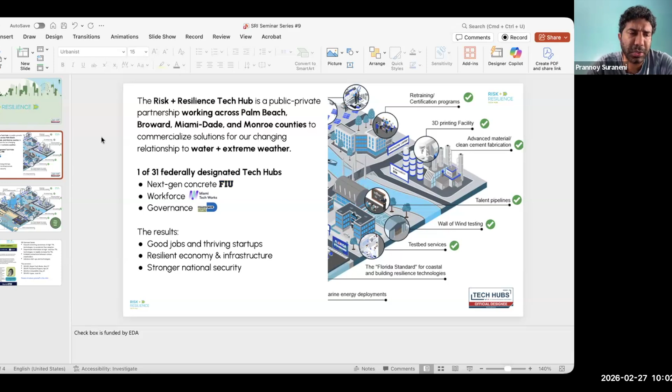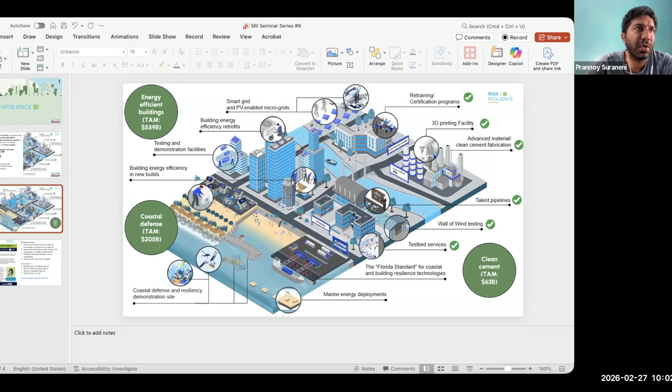national security. Broadly speaking, we are interested in an entire ecosystem. In the oceans, for example, coastal defense is critical. When we talk about buildings, energy efficient buildings are critical, clean cement for manufacturing purposes, and a number of other components that we are interested in are here. That's why, as part of these series, you've heard from a very diverse range of stakeholders or participants. So this talk is going to be about resilient housing for North America.

So I'm very pleased to welcome Kim Dupont-Madinier, who is a French-American entrepreneur, design engineer, and founder with over 13 years of experience developing innovative building technologies for global markets. And today she's going to talk about the work that she is doing as part of Meridian Solutions for resilient

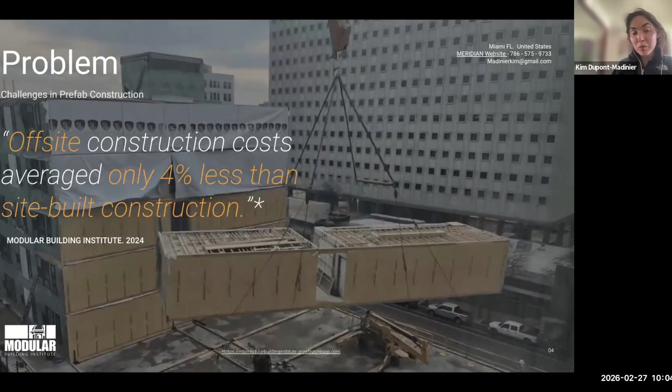And while some people believe that prefab could potentially solve for many of these issues, even the Modular Building Institute came out in an article recently and cited that offsite construction is only 4% cheaper than traditional construction. So, why is that? Well, based on my industry experience, what I found is that traditionally, most prefab builders are still building a building the same way you would on site, but just as a kit of parts in a warehouse facility. And what's happening is that these builders are applying commodity building materials that aren't actually optimized for streamlined

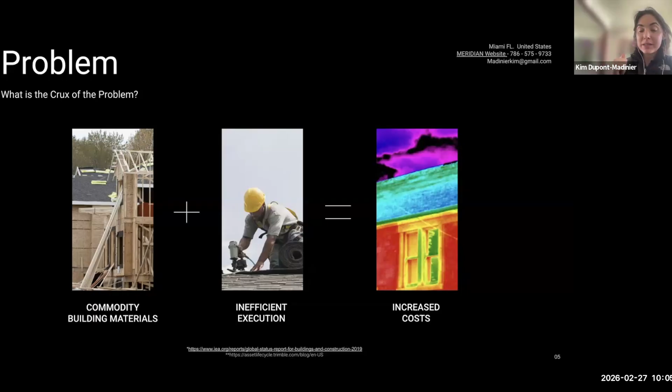manufacturing process. And so that's resulting in really inefficient execution processes that are carrying over between the off-site construction, shipping and handling, and on-site construction process. And moreover, often these building materials are only applied to meet code specifications instead of higher performance specifications, right? So all this ends up compounding in terms of increasing time, costs, and energy. Now, how do I know this?

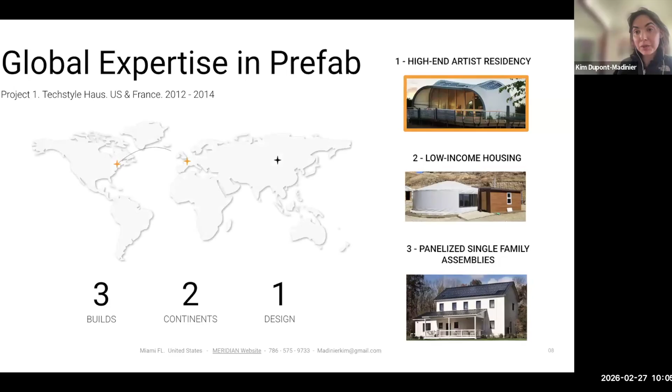Well, I've spent the last 13 years developing innovative solutions in prefab construction. I've co-created 20 patents to date in various system and assembly designs for the construction industry. And as a Fulbright scholar and design engineer, my focus is on finding new ways to make the installation of these building materials more efficient in order to achieve a more streamlined execution process. And my journey in developing this global expertise in prefab construction began when I was 21, when I created the foundation for Meridian's patented technology today.

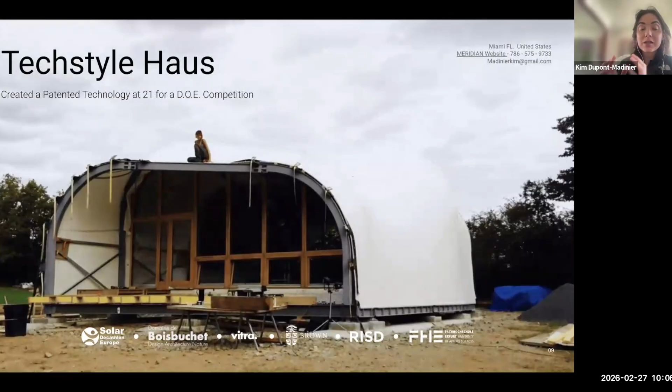Through a Department of Energy competition. So at the time, I was the student team leader of a project called Techstyle Haus. And our team sought to challenge traditional notions of sustainable design by not only building a prefabricated house that uses solar panel systems, which was the initial requirement of the competition, but by building the world's first ever prefabricated textile house that met the Passive House standard, which was also

solar powered. And so it was designed according to the Passive House standard, and as a result enables you to reduce your energy load by 90%. So that, in combination with the PV system that we applied, ultimately made the house a net zero solution. So on the inside, the house was incredibly innovative. It was a 1,200 square foot home, with 12 to 18 foot tall ceilings.

It cost about $1.2 million to build for 3 builds across 2 different continents, because our team was based between the Rhode Island School of Design, Brown University, and University of Erfurt Applied Sciences. And we had to build the house first in the US and then build it a second time at the competition in Versailles in France. And then we built it a third time in its final location.

So the house was incredibly well received by the general public, in addition to notable architectural magazines like ArchDaily saying that it was not only a model for energy efficiency, but an elegant piece of design as well. And while we were very well received by the general public, the feedback that we got from the judges was that they really recommended us to adapt the technology for a social need.

So after the competition, our team had actually planned to permanently install the house on an estate called the Domaine de Boisbuchet, which is an estate owned today by the previous curator of the Pompidou Museum in Paris. So for those of you who don't know, that's like the equivalent of the MoMA in New York City. And on his estate, he currently uses this house as a luxury artist residency for famous artists and designers who come teach workshops for a week or two at a time.

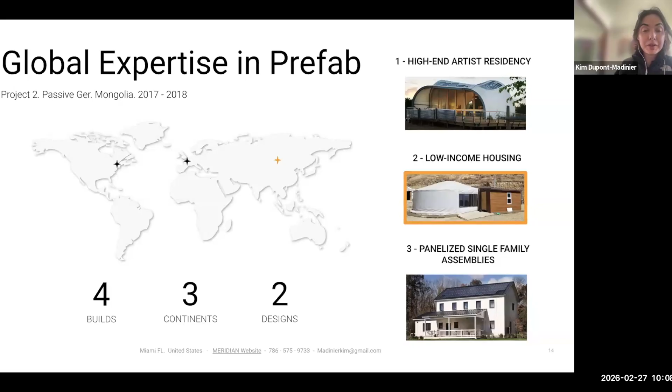So after the team completed that install, I did significant research in order to identify how we could adapt this lightweight, energy efficient building envelope system for a social need. And I ended up moving to Mongolia on a Fulbright fellowship. So why Mongolia? Because Mongolia today is actually the most polluted city in the world in the wintertime, where 2/3 of the city is burning between 6 to 8 tons of coal per household. And a large portion of these households are living in gers, commonly known as a yurt in the West, but that's actually a Russian term, and the correct Mongolian term is a ger.

And so the pollution today is so bad in the wintertime in Mongolia that it's 3 times higher than what the World Health Organization currently qualifies as being toxic. So cancer is rampant, and pregnant women have to leave the city because of birthing complications, and it's causing a whole slew of health issues across the city.

So when I arrived, I was really adamant about making sure I would effectively adapt the technology for a social need. And I met with a local community organizer in order to ask him if I could live with different families in these non-formal urban areas, specifically in a ger district, and collect qualitative and quantitative data so I could understand how best to adapt the technology, not only from a cultural perspective, but also from a monetary perspective, in addition to other important factors to make sure it was appropriately adapted, right?

And I'll never forget the 2 most important lessons that I walked away with from that experience. I love this fact because I actually find it to be very profound. The first is that every Mongolian actually knows how to build their own home, because every Mongolian knows how to build their own ger.

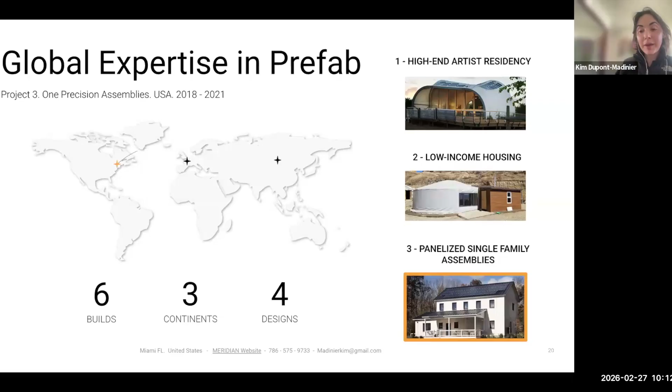So after that experience, even though it was incredibly profound and very rewarding from a social impact perspective, what I was very frustrated about was needing to figure out a way to adapt the technology so I could figure out how to scale it efficiently and in a cost-effective way. So I took a job with the world's leading building material manufacturer, Saint-Gobain, and became the lead design engineer for their US offsite construction initiative under one of their American subsidiaries called CertainTeed.

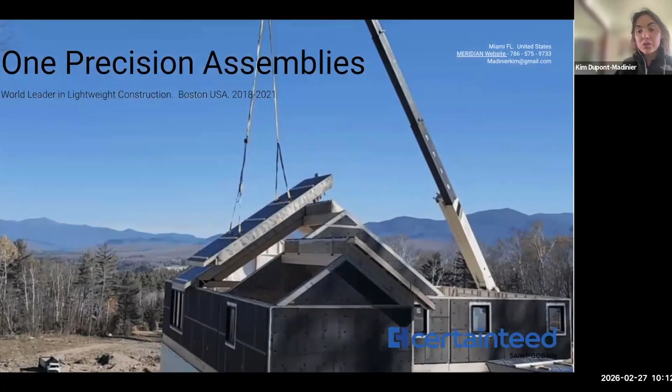So CertainTeed today, for those of you who don't know, they make classic commodity building materials, everything from vinyl siding, asphalt shingles, insulation, different vapor and air barrier systems, etc. And my job was to adapt their product portfolio of building materials for panelized single family homes. And what was incredibly valuable is at that time, the company, Saint-Gobain, had set a worldwide mission to become the world leader in lightweight construction.

So it was incredibly constructive and educational as an experience because it gave me a global understanding of the future of construction as well as the future of offsite construction or prefab construction as well. And today, these are the homes that CertainTeed is currently selling under One Precision Assemblies.

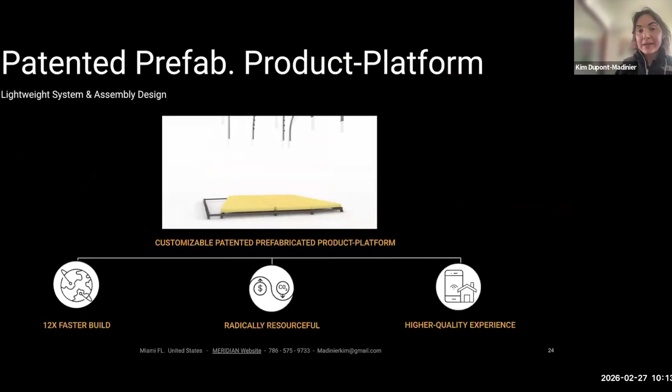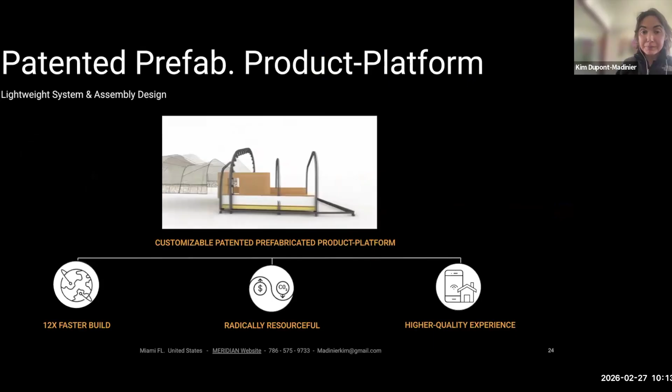Second, our solution is also radically resourceful. Why? Because our patent predominantly focuses on the application of advanced lightweight materials, which means that you're inherently reducing the overall weight of the building. And when you reduce the overall weight of the building, what happens is that you inherently have less material, less labor, less shipping and handling logistics, less equipment. And so you're inherently reducing the overall inertia that's required to execute on that project.

Second, our system is actually significantly leaner as well. So we apply these lightweight materials strategically to meet passive house design strategies so that we can reduce the overall energy load of the building as well. And our solution is also significantly smarter because what we figured out how to do is how to strategically apply those building materials so that we can actually build the building envelope the same way no matter the climate zone that we're in, which is incredibly innovative because it enables us to ultimately streamline the manufacturing process.

And then finally, our solution is simultaneously faster and quieter to execute. Why? Because our sub-assemblies are already pre-finished and they simply click, zip, ratchet, or slip into place, which also accelerates the construction time while also allowing for a quieter construction process.

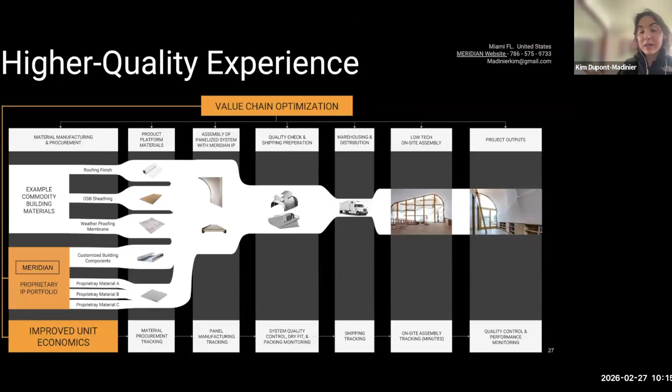As a result, all of these benefits ultimately enable us to significantly optimize the value chain of a construction project, which means that now builders can significantly improve their unit economics because they can now do more projects in less time with less resources, ultimately increasing their ROI.

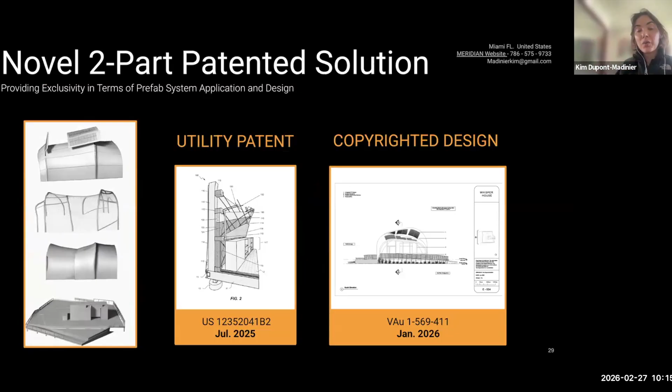So what makes our solution so unique? Well, our patent specifically. Today, we have a two-part system to our IP portfolio. We have a utility patent, which was awarded back in July, as well as a copyrighted design.

So between the different market application opportunities of our IP, our utility patent today can be applied to multi-story buildings, data centers, temporary event spaces, manufactured homes, coworking spaces, airports, climate-controlled warehouses, ICU units, and workforce housing.

While our utility patent, in combination with our copyrighted architectural designs, can be applied to modular homes, casitas and ADUs, luxury eco resorts, boutique hotels, and temporary housing. And this is no small market.

So if you take into consideration the serviceable, obtainable market today for the luxury hotel market, as well as the modular and prefab market, it is about a $33 billion market opportunity, and it's growing about 5 to 6% every year. So that means if we were to capture even only 1% of that market, that would make us a $330 million company. And at a 10x valuation, which is normal for startups, that would make us a $3.3 billion company.

Now, our traction so far has been phenomenal. We've already raised $1.2 million in grants and non-dilutive funding for the first 2 homes that are already built, operating, and occupied. And even though there are many different developers that we've spoken with to date, really we have 2 strong warm leads today for 2 different early adopter developers with whom we're actively discussing potential product applications.